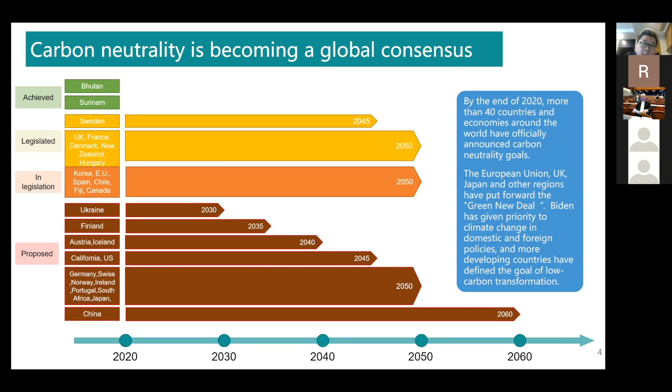As the economist said, on September 22nd, 2020, President Xi put forward that China will enhance its nationally determined contribution, adopt more effective policies and measures, and strive for CO2 emissions to peak before 2030 and achieve carbon neutralization by 2060. That's where the so-called 3060 targets were first officially mentioned by President Xi.

Then earlier this year, President Xi, in one of his central committee meetings on finance and economics, proposed solutions to achieve these 3060 targets: regulate the total amount of fossil energy, strive to improve utilization efficiency, implement renewable energy substitution actions, execute power system or power market reform, and build a new power system with new renewable energy as the main source.

That's the first time the new power system was brought out as a solution. Even though it's still a very widely and not clearly defined concept, this new power system is what President Xi proposed to achieve the very aggressive 3060 targets.

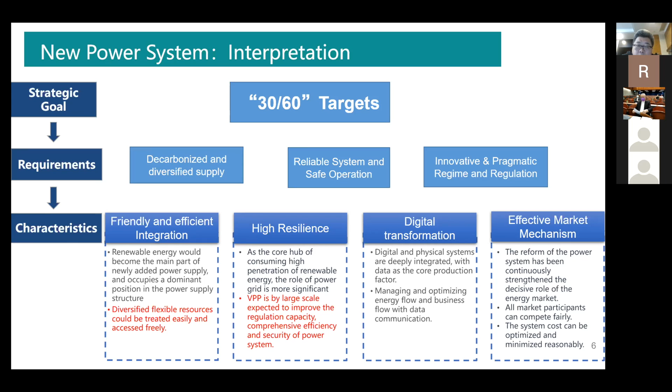I will also mention what's happening in this round of Chinese power market reform, and what lessons we learned, what experience we got from the pilots.

So you can see this round of the Chinese electricity market reform was actually kicked off by the NDRC and NEA in 2015. It follows the number 9 document issued officially by the State Council on March 15 of 2015. Once after the number 9 document was issued, all the Chinese provinces, the local governments, actually started working, some faster, some slower, but they all started working on the reform of their local power market, following what the number 9 document required.

That means the deregulated wholesale electricity market, the long-term contract trading market, and then the ancillary service market. Since 2015, they have been working on that for 6 years to build up all these types of markets. Even though they're still in the middle of the road, they are working very hard on that.

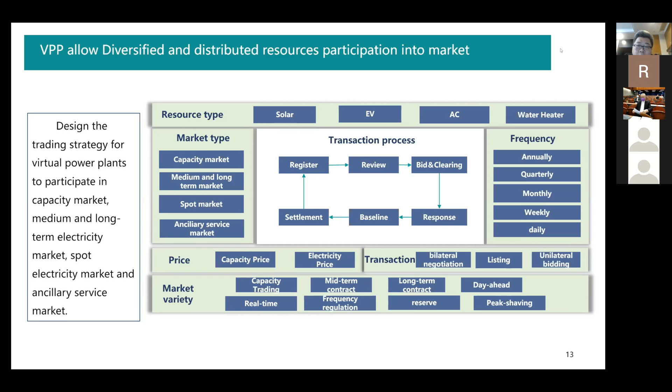And they will be able to participate in the market annually, quarterly, monthly, weekly, all the way down to daily. And they will also enjoy the revenue from the electricity price change and also the capacity price. So that VPP will become just like a new type of resource that can move up and move down according to the market signals, freely and flexibly, to give the grid operators more options to face the challenge from high penetration of renewables.

And some provinces in China, local governments in China, already issued some incentive policies in order to encourage the VPP or VPP type of demand side resources to participate in the market. So I'll just give you some examples. For example, in Shandong, the market maximum capacity

compensation price will be 2 yuan per kilowatt per month, and Zhejiang maximum subsidy for peak shaving activity for demand side resources could be 4 yuan per kilowatt hour, and also Guangdong, you can see even 4.5 yuan per kilowatt hour for peak shaving, and also 0.12 yuan per kilowatt hour for valley filling. And more provinces will join this group to encourage VPP type of demand side resources to participate in the market.

And then under these very good situations, that's why we share with you this cooling opportunity. Okay, I will check the time.

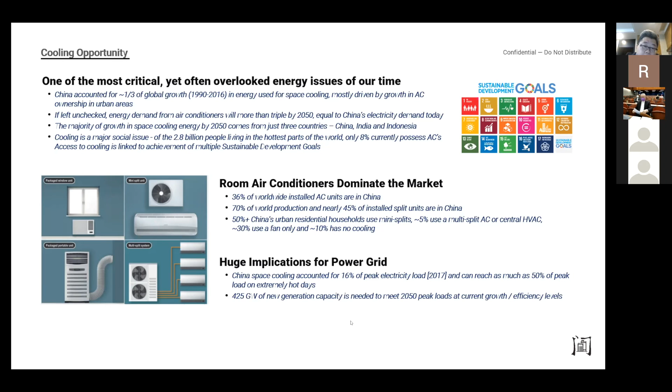And you can see the opportunity, like I mentioned, from the electricity market reform. From demand side resources, the mini split air conditioner existing market has over 500 million units, and all of them added together will give us a tremendous amount of capacity and flexibility to help the power system take in more new renewables, so as to achieve the 30-60 targets.

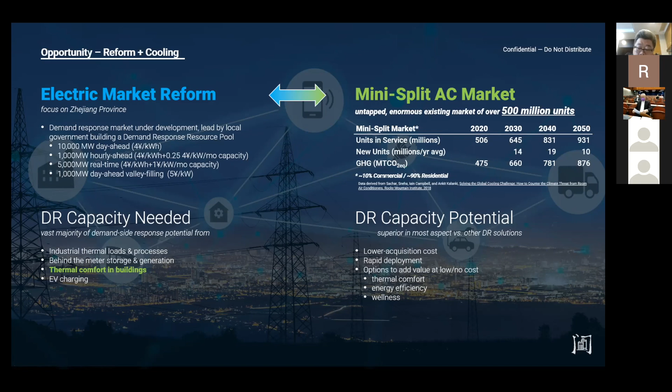Just in Zhejiang province, they have the plan to add 10,000 megawatts of resources from the demand side, and also 5,000 megawatts of real-time resources from the demand side. And these are not free. They will be paid, and if we use the tremendous amount of existing resources from the split AC market, we will get surprisingly high revenue or return on our investment.

And so EnerCloud partnered with Flare to propose this virtual power VP Model 1 to achieve three targets. Number one, it is designed for mini split, mobile, window and cassette air conditioners, and it will be very easy to install for every family. And once it's installed with VP Model 1, they will become smart devices. They can be controlled by the owners' mobile phones, and also be visible and controllable from the cloud. So they will have great potential as one integrated virtual power plant.

So with the help of this VP Model 01, we'll be able to convert traditional air conditioners, no matter smart or not, into virtual power plants, and also partner with 3M to convert them into air purifiers. That will all be with the help of this plug Model 01. And that will allow us to turn all the traditional ACs, all types of AC, into split AC, into the smart AC, and also to become air purifiers.

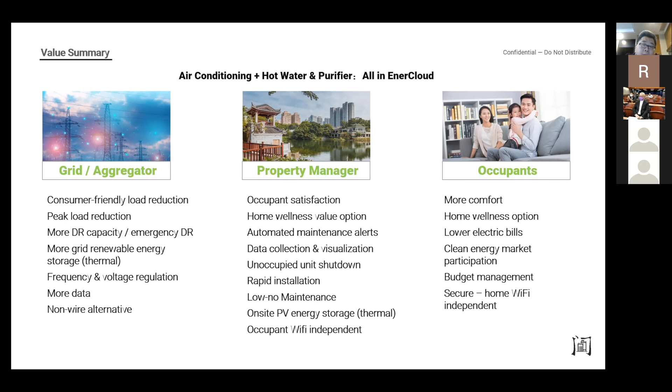So that's pretty much what I want to share with you all, friends online or offline, today. What I just want to summarize: in order to achieve the 30-60 targets and to help the global climate change, the Chinese government really desires to work on two things.

One is the market reform, to almost rebuild the power electricity market, and to allow all the flexible resources to be able to openly and fairly participate in the market. And secondly, it also desires innovative technologies, not only from the traditional supply side,

but also from the demand side. One example is the virtual power plant, like I said today, in order to help the new power system build up from both sides. So those are the messages I want to deliver to you.

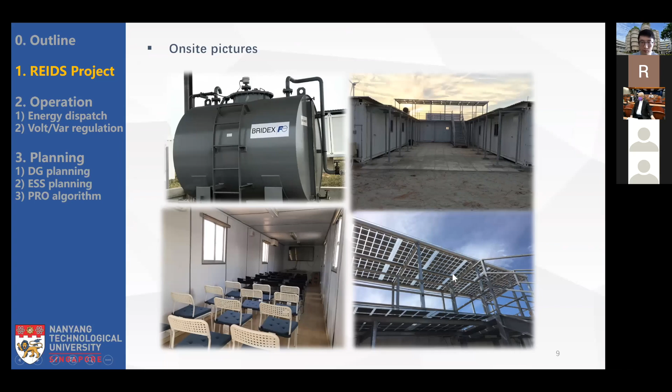Okay, so this renewable energy integration demonstrator project is actually a comprehensive platform for us to do research and development, as well as demonstration and test bedding. So in my research group, we are mainly focusing on the system level coordination of the DERs in the microgrid. So this is a general framework of our research.

So at the physical layer, we are basically considering 3 types of DERs, including the flexible load, which can respond to the utility's control signal, and the energy storage system, including the electrical energy storage as well as the thermal energy storage, and the distributed generators, including renewable energy based, such as solar and wind power, as well as non-renewable based, that is dispatchable distributed generator resources, including the micro turbine and combined cooling, heating and power unit.

Well, for the specific research problems, we are covering the whole spectrum of microgrid control, operation, and planning. In terms of control, we are looking at frequency and voltage control from the primary to the secondary control level, ranging from milliseconds to seconds. And for the operation, we are looking at the energy dispatch as well as the voltage regulation, which is also called tertiary control. This operation problem ranges from minutes to several hours time interval.

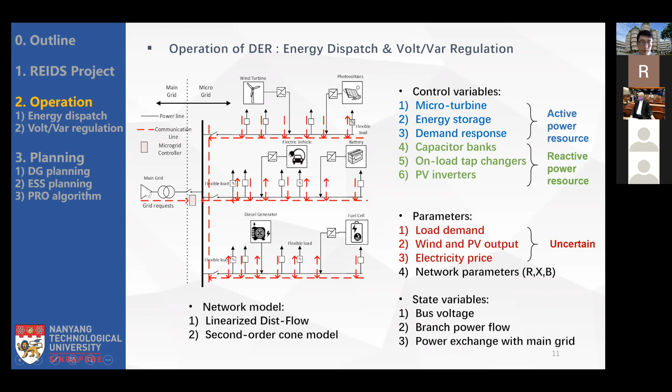So for the sake of the optimization, we need to design some linearized or tractable model for the power flow. And besides, we have state variables, including the voltage magnitudes of different buses, the power flow of different branches, as well as the power exchange between the microgrid and the main grid. So this is the general problem description for the operation.

Then, as I mentioned earlier, the biggest challenge to the operation of the microgrid is actually the uncertainties from the renewable energy resources, as well as the load demand. Well, in order to address these uncertainties, in our research group, we have developed a series of so-called two-stage coordinated operation approaches. The principle is that we want to coordinate different DERs in different time scales based on their different characteristics as well as the responding speed.

For example, the wind and the solar power can fluctuate very fast within, let's say, 10 minutes or even 5 minutes. So the traditional resources may not be fast enough to respond to them. However, other DER resources, let's say the energy storage system, have a much faster responding speed. So it's sensible to divide these DERs into different groups. Then we respectively dispatch them and coordinate them as a whole to manage the operational uncertainties.

So in this figure, you can see the general principle of the so-called coordinated approach. So basically we have two stages. For the first stage, we dispatch the relatively slower responding DER units in a relatively longer time scale, let's say from hours to even a day ahead. And in the second stage, we dispatch the faster responding or more flexible DERs within a shorter time scale, ranging from 15 minutes to hourly ahead. So the two stages are coordinated through a so-called two-stage optimization model.

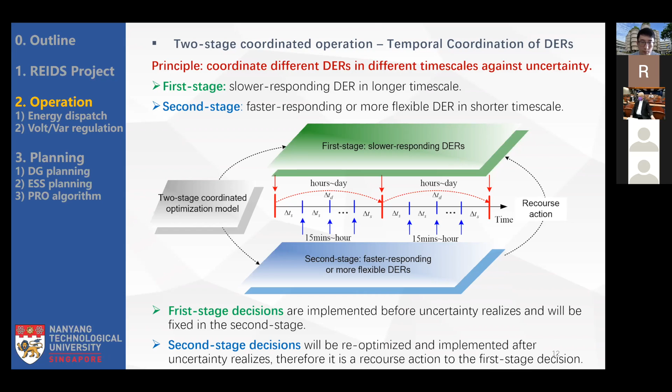So to summarize, the two stages are actually coordinated at different time scales towards the same objective, that is to maximize the total benefit or minimize the total operation cost of the full microgrid, considering the uncertainties. And specifically, in terms of the optimization algorithms, in order to address these uncertainties, basically we have two types of optimization technologies. Number one is relatively more traditional, which is called stochastic programming.

So for this method, we model the uncertain variables based on their probability distribution function, PDF for short. So the input of this algorithm is a point prediction of the uncertain variable, let's say the renewable power output, the load demand, electricity price, in terms of point forecasting. Then based on this point forecasting, we will randomly sample different scenarios based on their PDF. And then the whole optimization model is to minimize or maximize under the expectation of these different scenarios. Okay, so the advantage of this traditional approach is a relatively simpler formulation and solution process.

However, in order to model the uncertain parameter, we do need its probability distribution function, which is, however, not easy to obtain in practice. And another shortcoming of stochastic programming is that because we are optimizing under the expectation, we can only achieve a probabilistic guarantee of the constraint satisfaction. So this is the principle of stochastic programming.

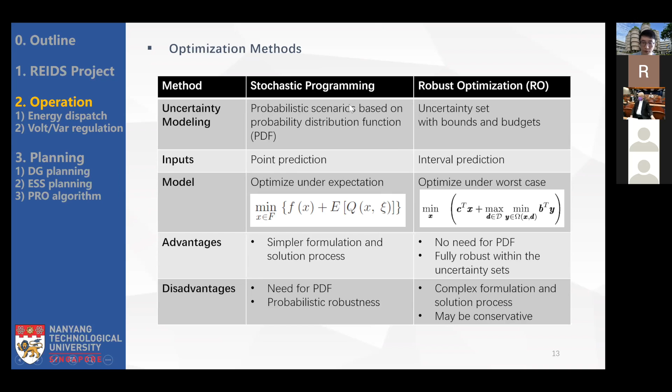However, this comes with disadvantages because this may be very conservative. When we consider the worst case, probably the solutions may be over-conservative. So this is basically the two mainstream optimization technologies for the microgrid operation problem.

Next I will briefly introduce a representative work for the energy dispatch for the DERs. We are actually optimizing the so-called day-ahead price-based demand response and hourly-ahead microturbine output dispatch. The principle of price-based demand response is that the utility company wants to use the price signal as a control measure to adjust the user's load profile.

Basically, the higher the electricity price, the lower the power demand will be. There is a negative relationship between the two, and this relationship can be modeled by the so-called price elasticity. According to some literature study, this price elasticity is negative 0.38 for the Australian power system.

While for the Singapore power system, we are asking our master students to do a comprehensive survey to study this parameter. Based on this price elasticity, you can see that originally when the price is at 100%, the original level, we have 100% load level.

While the electricity price increases by 10%, you can see the load will decrease by 2%. And reversely, if the electricity price is reduced by 10%, the load will increase by 2.3%. So this is a linear negative relationship between the two.

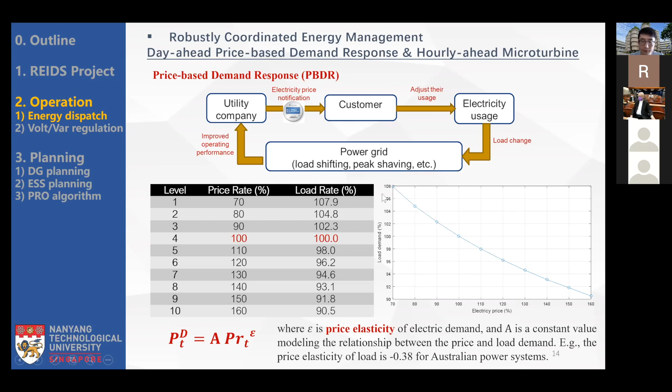In our research, we note that price-based demand response is implemented in a day-ahead time frame. However, during the intraday time frame, we still need to balance the total demand and total generation. So in the microgrid, we can dispatch other flexible resources. In this case, we consider the microturbine, which has a relatively faster responding speed.

Under a two-stage coordinated framework, in the first stage we optimize the price-based signal for demand response, and in the intraday second stage we hourly dispatch the microturbine. The two stages are coordinated through the robust optimization model, which is briefly modeled here.

The total objective function is actually to maximize the revenue of the microgrid operator, which is equivalent to minimizing the negative value of the profit. So they are mathematically equivalent.

In terms of the uncertain variables, we consider the solar PV and wind turbine power output, and we define their lower bound and upper bound to model their uncertain variation.

Besides, we also model the demand response uncertainty, because not all of the customers will respond to the price signal—some customers may not be sensitive to the price signals. They will continue to use electricity no matter how the electricity price changes. So this type of uncertainty is also modeled here.

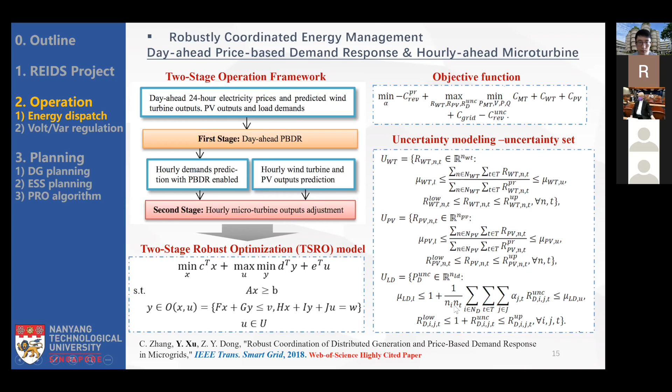After that, we also need to ensure that this price-based demand response does not affect the customer's benefit, meaning that after they take this price-based demand response, their total electricity bill should not be increased, and their access to electricity should not be affected as well. So this type of constraint should also be well modeled.

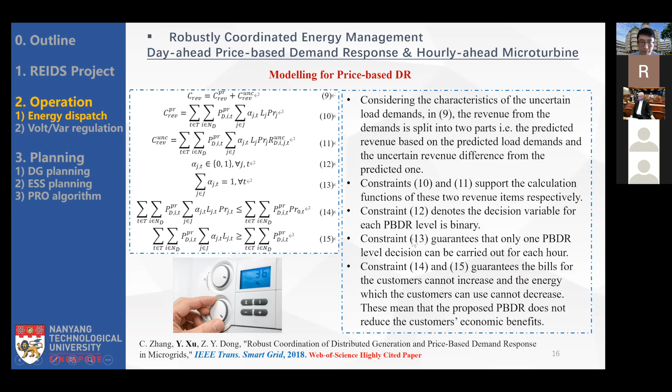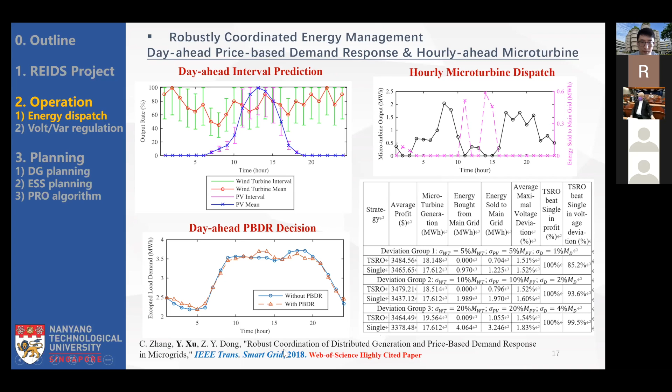We also compare our robust optimization method with others considering different uncertainty levels, and you can see that for different uncertainty levels, the proposed algorithm can achieve very good robustness under the uncertainty. This work has been published in this paper three years ago, and it has been listed as a highly cited paper since then.

Okay, then the second operation problem is on the voltage regulation. As we know, for low voltage distribution networks, the resistance to reactance ratio is much higher than the high voltage transmission network. That means the active power fluctuation from the renewable energy resources will also affect the voltage magnitude of the distribution network.

So when solar and wind power are always fluctuating, the voltage magnitude will also fluctuate as well. While the traditional voltage regulation devices, such as the capacitor banks and transformer tap changers, are mechanical equipment, they cannot respond fast enough to this voltage fluctuation.

On the other hand, as I mentioned earlier, solar PV power converters, as power electronic devices, actually have reactive power support capacity. So the idea here is to utilize the power converters of these solar PV renewable energy resources to provide reactive power support as well, and combine these power converters with the traditional mechanical devices, capacitor banks and OLTC, together to coordinately support the voltage of the grid.

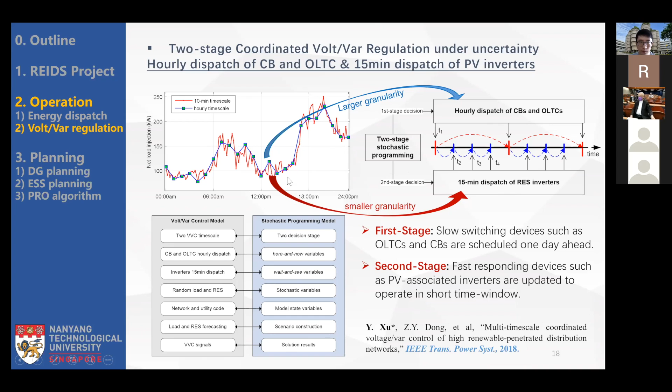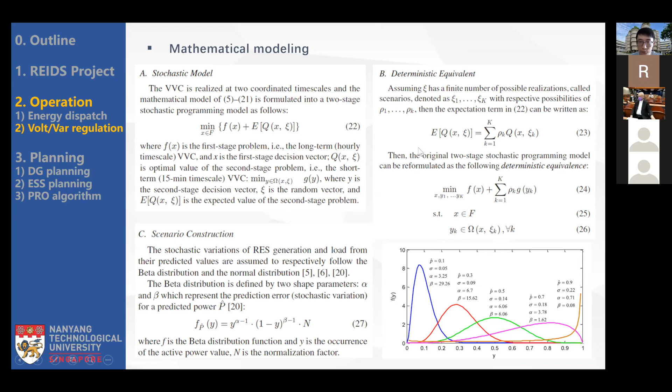In terms of the mathematical modeling, we minimize the total expected power loss of the network for the operational intervals, and we consider different random scenarios of the renewable power output as well as load variation. After some mathematical operations, we convert the whole problem into a deterministic optimization problem which can be easily solved. Here I can show you some of the simulation results.

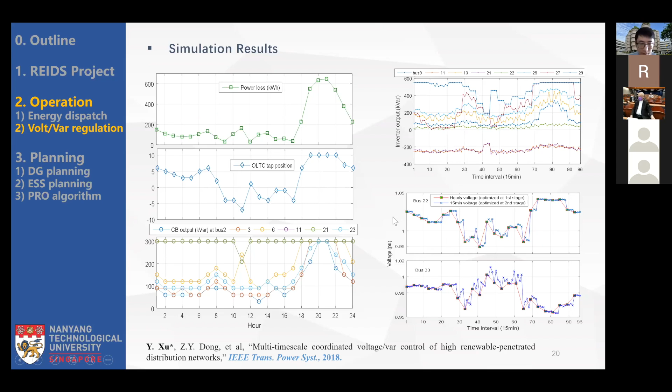These two figures show you the voltage magnitude of two buses. You can see that they satisfy the operational limits, which is plus minus 0.05 per unit. So this is another work for the voltage regulation problem in microgrid operation.

Then in the third part, I will briefly talk about the planning of the DER units in the microgrid. Generally speaking, the planning problem is actually a portfolio decision-making problem. The objective is to select the right type of DER units, to size and locate the units, as well as to design the investment timeline, taking into consideration the distribution network model, uncertainties of renewables, power output, and load demand, as well as the model and characteristics of the DER units themselves.

In this work, we basically consider two types of DER units, including distributed generators as well as energy storage systems. The whole problem is modeled as an optimization problem to minimize the total investment cost, taking into consideration different constraints, and to decide the size, site, type, installation year, etc. Because we also have uncertainties for this problem, from short-term operational uncertainty to long-term planning uncertainties, we also apply stochastic and robust optimization algorithms for this study.

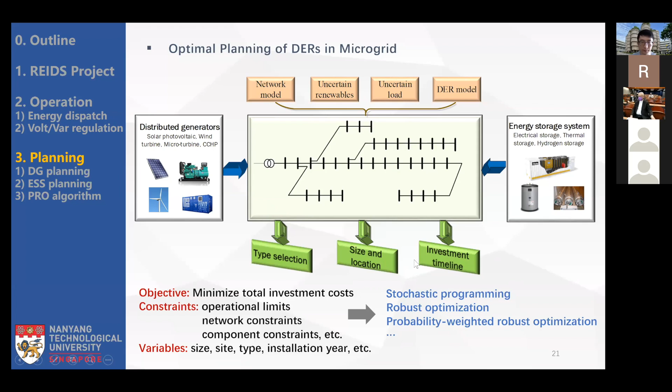The first one I would like to introduce is on the distributed generator planning. Here we consider different types of distributed generator units, including dispatchable diesel generators, as well as non-dispatchable solar PV and wind turbines, into the microgrid system.

This is a compact form of the mathematical model, and the whole problem is formulated as a so-called embedded two-stage optimization problem. Then I can introduce you to the planning results, as you can see here in this table. We define 4 years as one phase.

So totally we are considering 4 years as a phase, 12 years of planning time horizon in total. For different buses of the system, the results show how we place and size the different units, including the CCHP unit and other thermal units, electrical boiler, solar PV, and wind turbine for different buses and different phases. The objective is to minimize the total investment cost plus the expected operational cost.

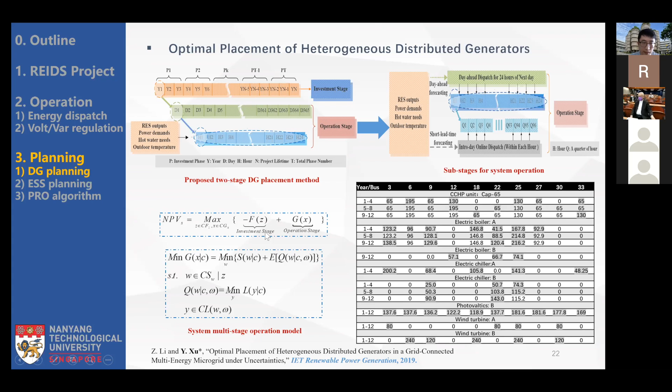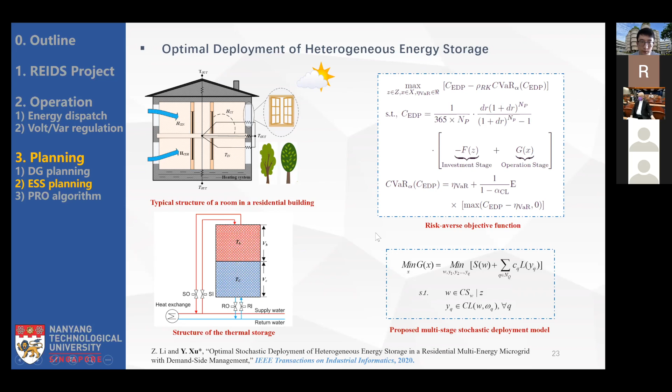After distributed generator planning, we also did some work for energy storage system units planning. Here we consider a multi-energy system, including both the electric system and the thermal system. For this work, we also need to model the thermal load of a residential building because we want to provide district cooling for the customers. The energy storage system considers both battery electric energy storage and thermal electrical energy storage.

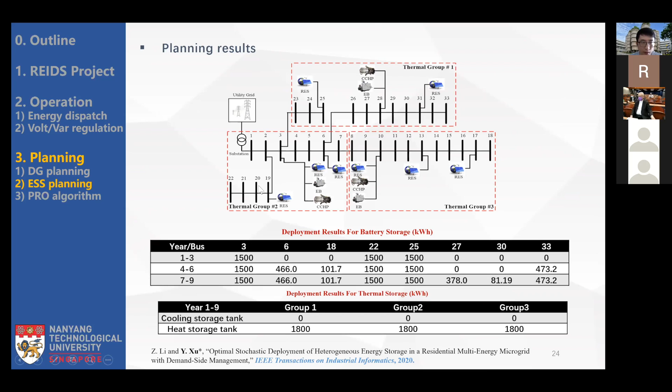So the above is our representative work in this area. Apart from that, we have also published many other works on this topic, so if anybody is interested, you can look at our publications. Actually, we just completed a whole book on this topic, which will be available from this month or early next month. This book will summarize all of our research works as well as practical projects in this area.

Okay, with this, I end my presentation. Thank you very much for your attention. Thanks. Thank you.

Thank you, Professor Xu. It's a very interesting topic, and thank you for taking the time from Singapore to join us. I think the timing of all of today's topics is very fitting. I was told by my Mercedes salesman that if you want to buy an electric Mercedes in Hong Kong, you have to register, prepay a deposit, and wait at least 2 more years before you can see your car. So the line is very long. But at the same time, Hong Kong already announced that after 2035, they're not going to issue another car license for a petrol fueled car anymore.

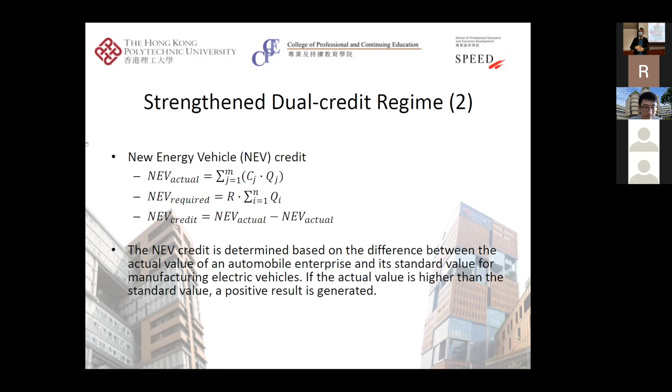So again, the purpose of this NEV credit is like a pool as well, like the CAFC credits. So if the company manufactures more electric vehicles, they will get more credit for them to sell or try to seek for extra gain in this financial year. So the electric vehicle manufacturers will have the financial income in two aspects. One aspect is the manufacturing and sales of electric vehicles, and on the other side, they can also sell the credits that they gain through their manufacture. To whom? To those who get a negative number on the CAFC credit. All right.

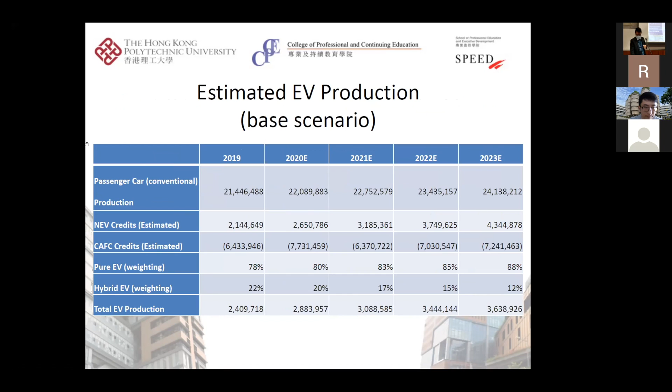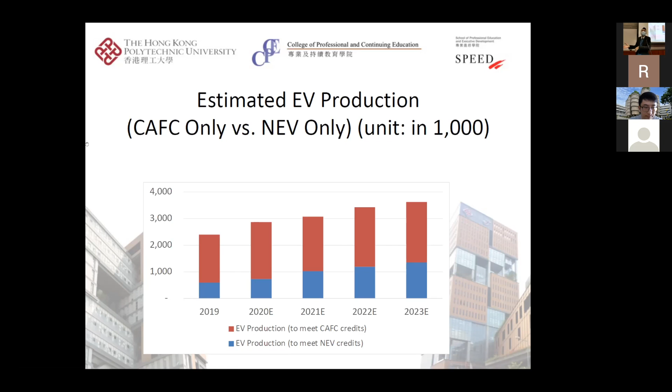Because the paper was published earlier this year, there will be updated numbers. I hope that I could have another opportunity to come again and give you the updated numbers after 1 or 2 years.

So they kind of brought a challenge for the electric vehicles industry in China to achieve their targets as required by the national level authority. Of course, one of the reasons is due to the pandemic, and we didn't foresee that in the year 2019. So there are some possible solutions that we can make up and try to cross over this challenge.

So we also propose some of the policy implications in our journal article. So for example, we encourage the ongoing development of market-based green financing in China, which will provide an alternative source of low-cost funding for the further development of the EV sector. Because financially, there is one constraint for the EV manufacturers.